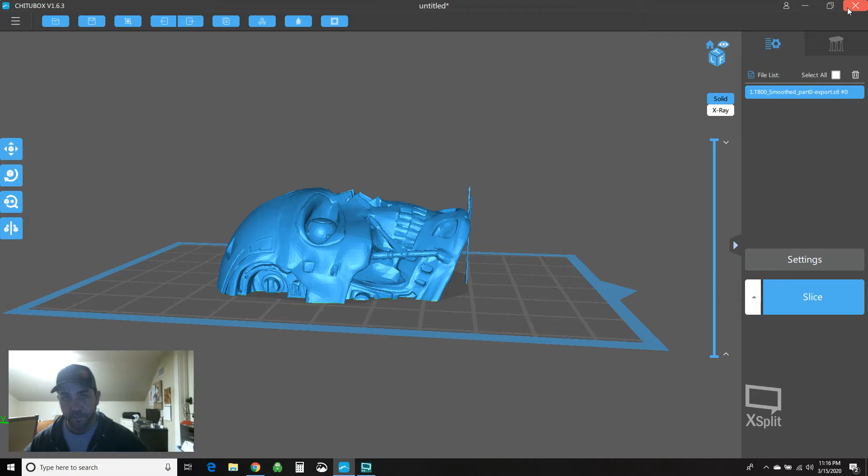Another quick Chitubox video. We're going to talk about hollowing in Chitubox. It's really simple, but there's a couple little pitfalls you need to look out for when you hollow. Other than that, it's pretty simple, so this should be a quick video. I've got this little T800 head, sliced in half, and it's solid. It's a decent sized print, takes up a good portion of the build plate, so there's definitely an opportunity to save some resin. I'm going to hollow him out.

To hollow, it's really easy. You go here to the hollow button, and you have some options: wall thickness, your precision - I don't know what that does, haven't messed with it frankly - and whether you want to hollow inner or outer.

So think about it like this: if you're doing an inner hollow, it's basically taking your solid shape and gutting out the inside of it, except for 2mm wall thickness all the way around. If you do the outer, it's doing exactly the opposite, where it takes your shape and peels off 2mm all the way around it.

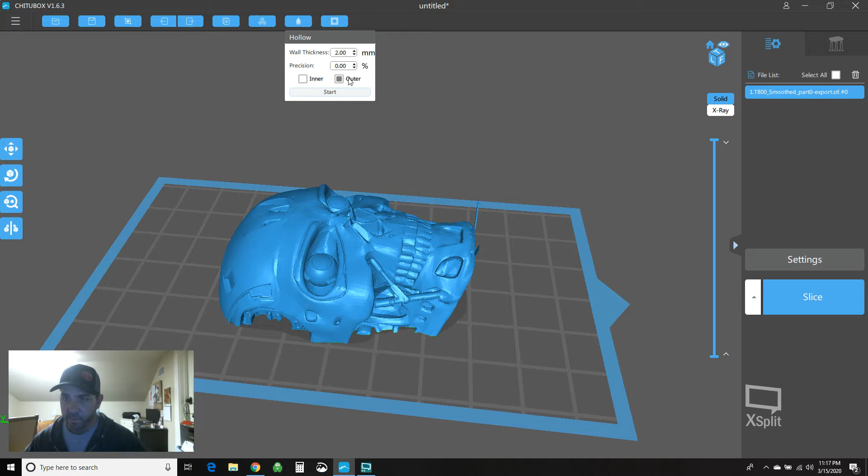I don't know why you'd ever want to do that. It comes out funky, here I'll show you. So here's an outer hollow, right? It's peeling off 2mm wall around everything, so it's doing its thing, and there you go. It's beautiful. No. I don't know why you'd want to do that.

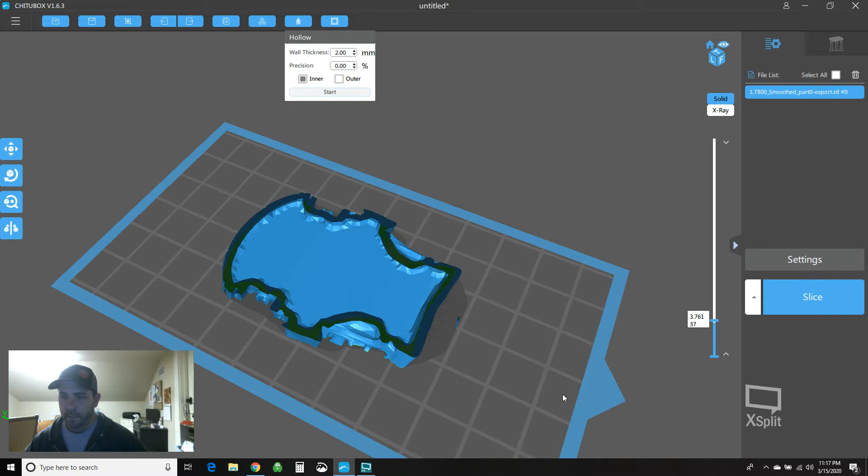So Control-Z that crap. An inner hollow does the exact opposite - it just sort of guts out everything except for the 2mm walls, and it will automatically start to bring it down. And there you go. So you don't want to just say, awesome, I'm ready to print, go.

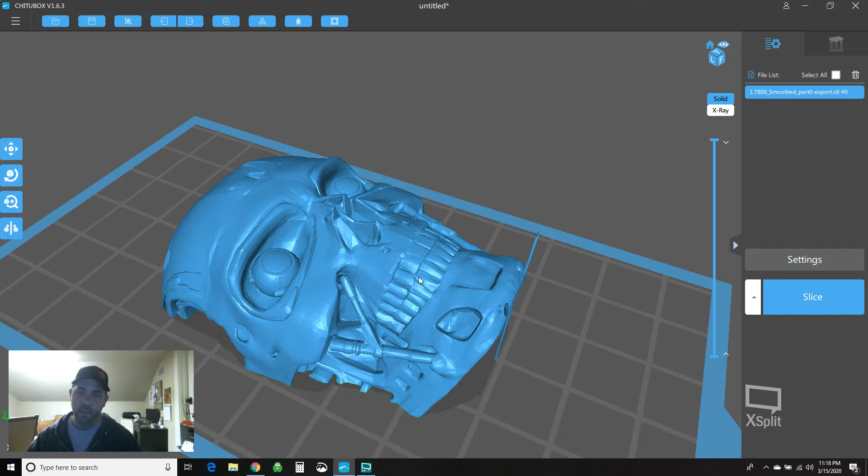While I could print this straight to the build plate and probably get away with some of these features except for these bars without supports, it's definitely going to need supports added. Specifically, one of the pitfalls you really want to look out for are islands created because of the hollow. If I was printing this guy solid, all these features in here you wouldn't even worry about because everything would be touching the build plate.

But because it's hollow, and we come down here into this section, you can see right here, now we have some islands printing. And those islands are going to cause a problem if you don't add supports. So again, that's just something to look out for.

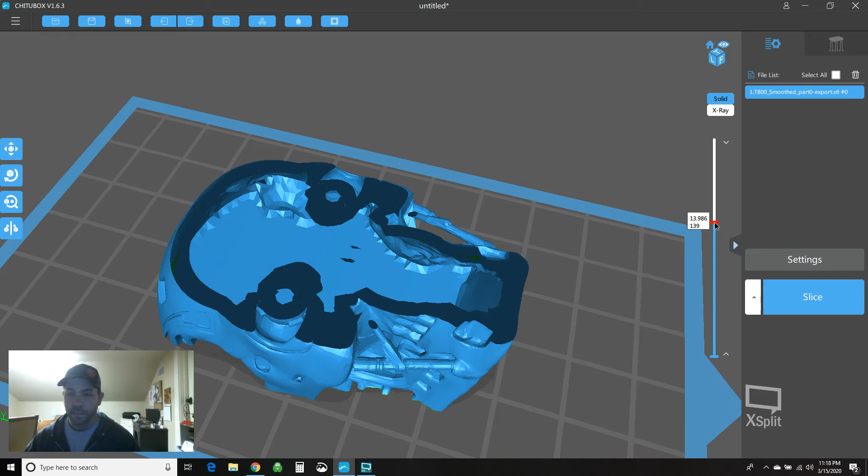So you can see, pretty much everything from the bottom up, you're in pretty good shape. I don't see any islands yet, it's all solid, it's all thick, no problems. And then these little bars here on the side of his face will be an issue, so it probably needs some support there.

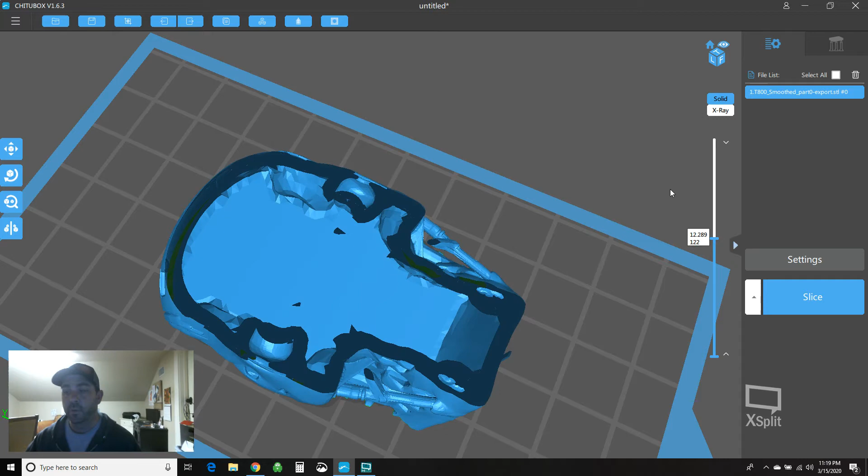And then right about here, you see now we get these islands forming in the middle of the print, and those aren't going to turn out too well. You're going to have stuff stuck to your FEP, you might have a failed print, you might have a cracked screen, all kinds of weird things could happen. So you need to make sure we're adding supports, and we'll do that in just a second. But again, that's just one of the pitfalls I think you need to look out for when you are hollowing.

So now that you've got this hollow, you've got to have a way to get the resin out. Unless you plan on drilling a hole manually when you're done, you can put holes in it now. Now's probably the time to do it.

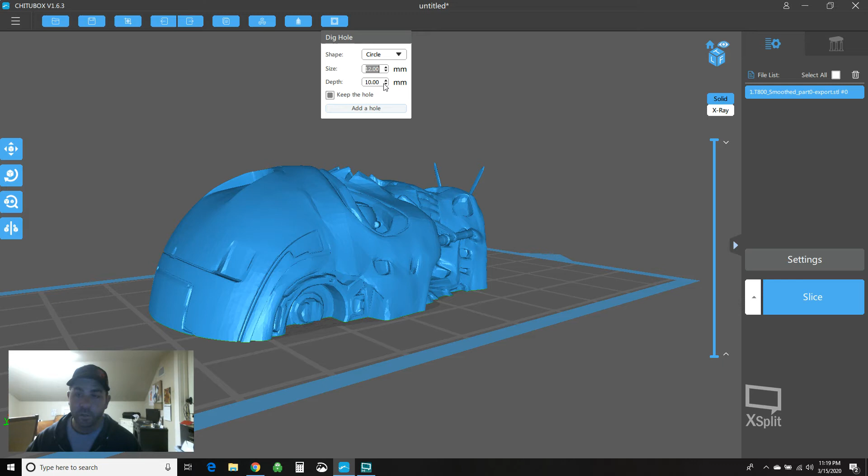To put a hole in here, go to the icon that says dig hole. You specify if you want a circle, hexagon, or square, and your size. I'm going to make a big hole, let's say 12mm, and a depth of 5, since my wall is 2mm so you don't need much more than that. Then there's an option to keep the hole, which means keep the plug, and I'll show you that.

You specify where you want it. I'm going to put one here in the bottom. Now the keep hole feature means keep this plug, so that once you've drained out all the resin, you can actually put this plug back in and seal it back up with glue or more resin or whatever you want to do.

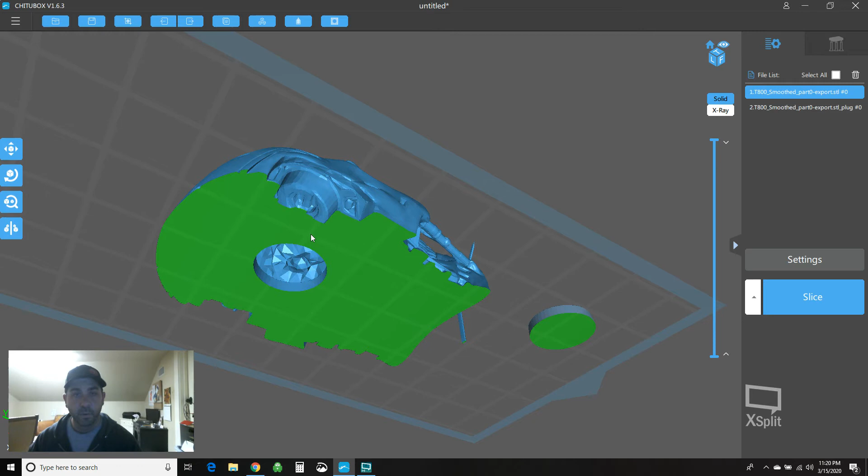I'm also going to add another hole down here on his chin, because it's easier when you have two holes to get all of the resin out. So I'll dig one out in his chin. Again, it keeps two plugs, and you can see over here on the right side I now have three bodies that are going to be printed.

If you're going to add supports, you want to add supports to these and orient them as such, just pretend that they're separate bodies. You want to position and orient them in a way that adds supports so it's going to be the most successful print.

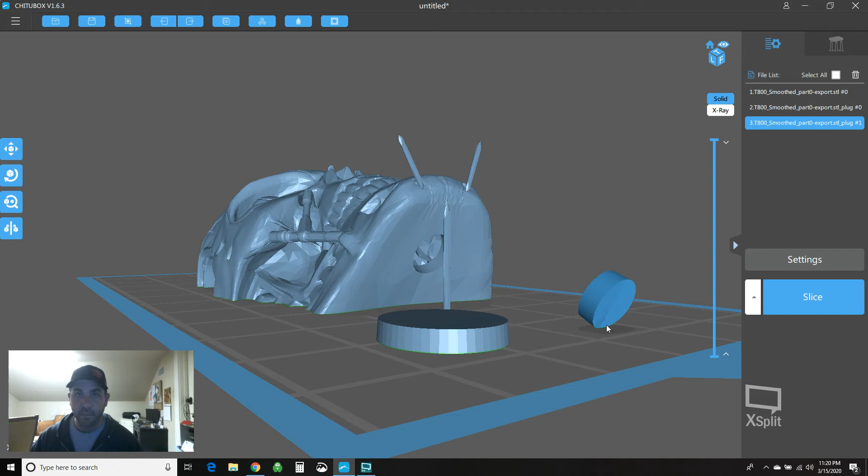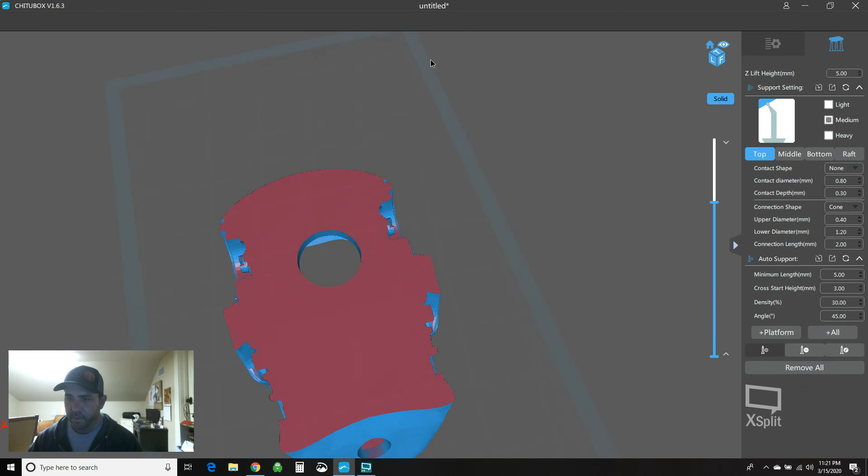Now let's click over here to the supports. For this demonstration, if you went through and tried to add manual supports, it's really a pain when you get these islands to figure out where and how to add them. You can get at it if you've got a big enough hole to put supports in. But this is one of the cases where auto supports really come in handy. So I'll say all auto supports, doing medium, though it probably really should be heavy.

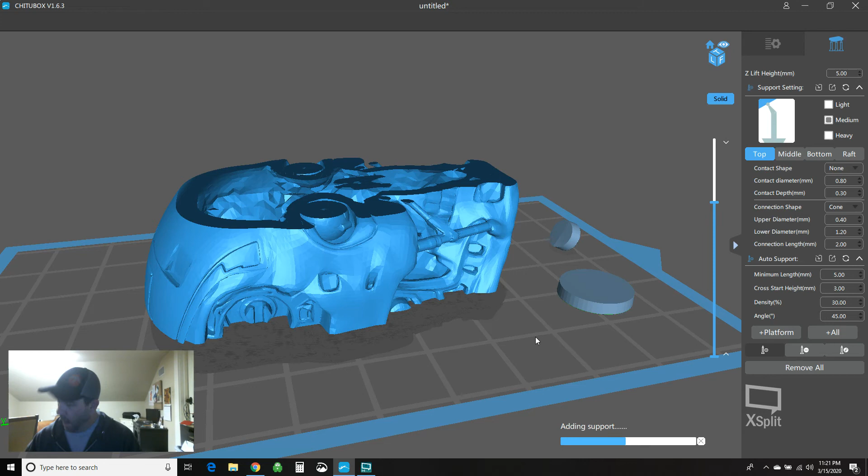Adding support, adding support, adding support... still going, almost done, there we go. So you can see it has added support inside the model to support all of the overhang structures that we've created by hollowing out the model.

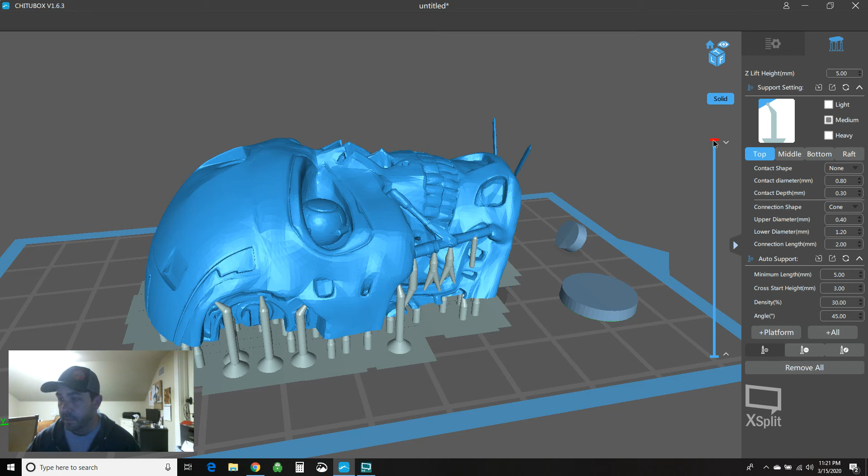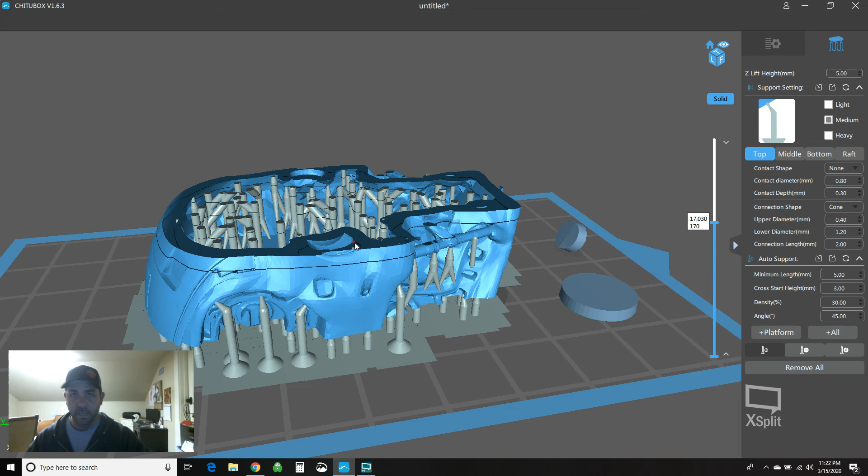It's important, but something to keep in mind: if this is a print you're doing in clear resin and you want a nice clear finish with no finishing work, this is going to be a problem for you. But if you're just going to prime and paint it, then who cares about all these supports in there? You'll wash it out with IPA or whatever your solution of choice is, and you can leave these supports in there. It doesn't matter, you're going to paint it all up anyway, as long as all the resin's cleaned out inside. But these supports are super important to support the islands we've created in the hollowing process.

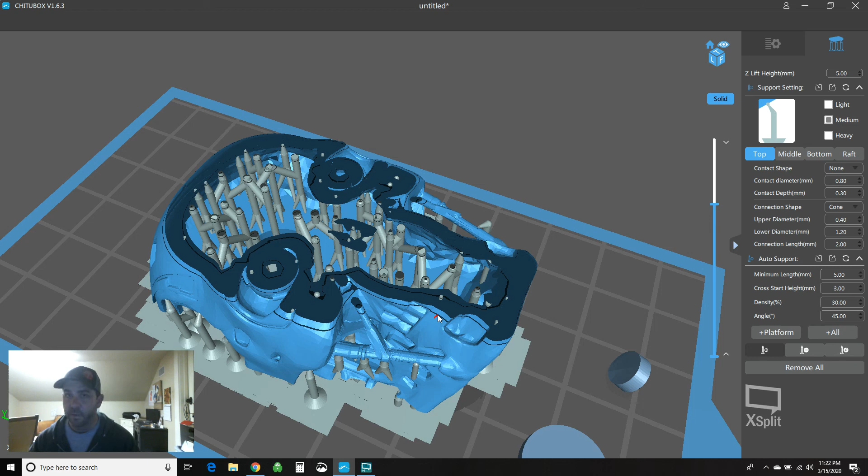So again, you'll have to go support these guys. This is sort of an extreme case of hollowing. A lot of the time, if you're doing a larger bust or something standing straight up and you just hollow it out and put in a hole, you don't need to do supports on the inside. But this is one of those cases, like I said, one of those pitfalls where you can have a failed print quite easily if you're not paying attention.